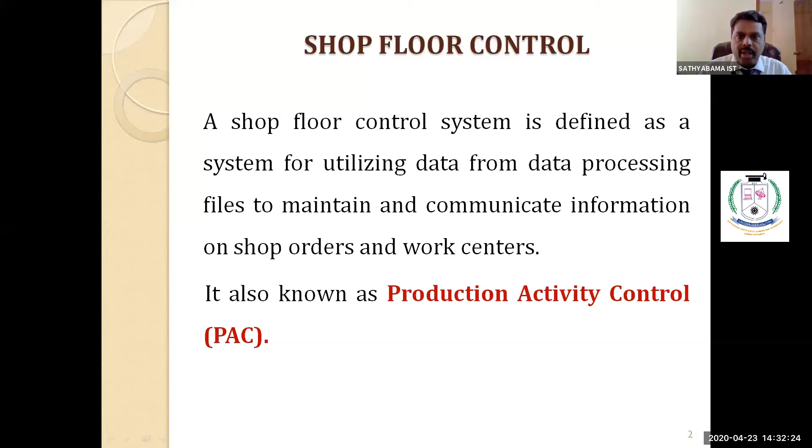If you consider any manufacturing industry, shop floor control is essential not only for utilizing data from the data processing file, but professionals have to maintain and communicate information on present job orders and the work centers available in the particular concern or industry. That is why it is called production activity control.

Next, I can move on to the functions of shop floor control. There are 5 important functions. The first is scheduling, that is product scheduling, when the product is to be manufactured and when it is to be dispatched, that is dispatching. Then the follow-up after dispatching is very essential to get customer satisfaction. Once the customer is satisfied, only then can they give repeated orders for any kind of components. So follow-up function is very crucial with respect to the customers.

Then providing output data, which relates not only to the product but also to how many products per day the unit can manufacture, and the capabilities of the factory to manufacture that particular product or part. Then providing efficiency. Apart from scheduling and proper dispatching, the follow-up with customers will be crucial. Based on that, customer satisfaction can be achieved and one can get repeated job orders for any particular part.

So providing output data is also follow-up communication, which is very essential for any industry. And then providing efficiency, not only in dispatching the component properly but also in proper follow-up, and the quality of the products manufactured by the concern should meet the customer's requirement and should be as per the standards.

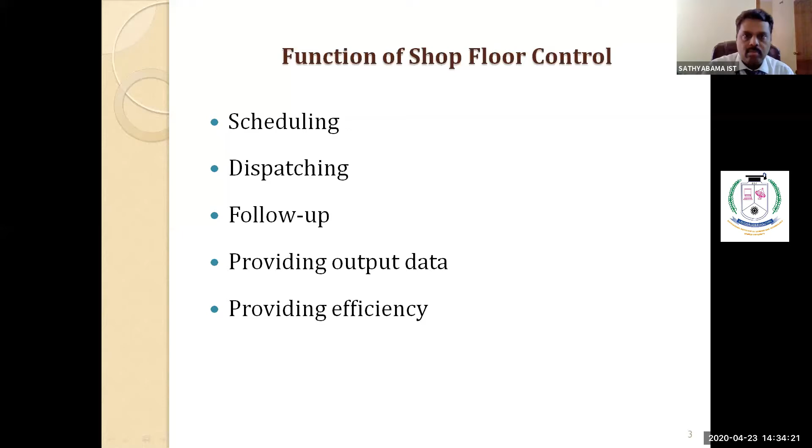So I would like to give an illustration of shop floor control. To understand this concept in a simple manner, consider new orders X, Y, and Z coming from 3 different customers. This is the place where unreleased orders are kept, meaning the orders may not yet be approved for production. This is the production control people or professionals who operate or control the unreleased orders.

Once a new order X gets approved from the authorities, the production control people, by considering the availability of work centers, machine tools, and skilled professionals, will release the order, which comes as an input. This is nothing but work in progress. The professionals or skilled laborers, with the help of machineries and available machine tools, manufacture or do the machining process of the particular product, converting raw material into a full-fledged product as per customer requirement.

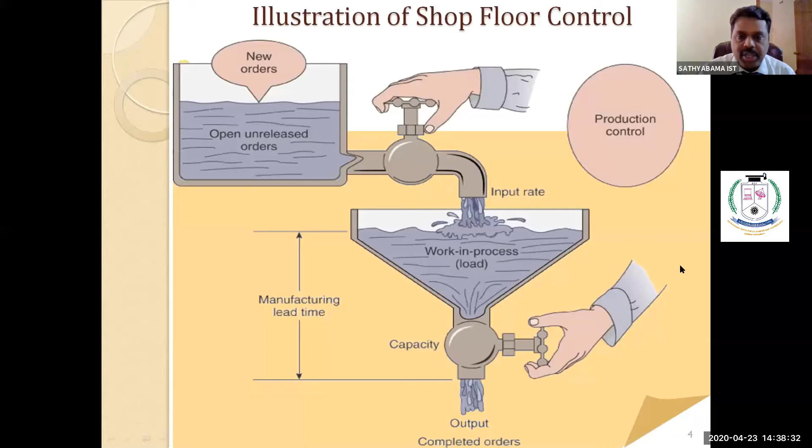Now I can move on to the phases of shop floor control. The first and foremost phase is order release. This phase provides the documentation needed to process a production order through a factory.

Normally, proper approved documentation is required for processing a production order. As I said in my previous illustration, customer X, customer Y, and customer Z might give different job orders, but to process the job order or production order, specific approval from the production planning control team is very significant and essential.

Once the document is available, only then will the production planning and control people process the production order through a factory or company. The collection of these documents is called a shop packet.

The shop packet consists of route sheets. A route sheet is the sheet which contains the sequence of manufacturing or production operations along with the available machine tools and necessary instructions. All manufacturing concerns have route sheets, and based on them they proceed with machining operations in a sequential manner so the job can be completed within the stipulated time period without affecting the customer's requirement.

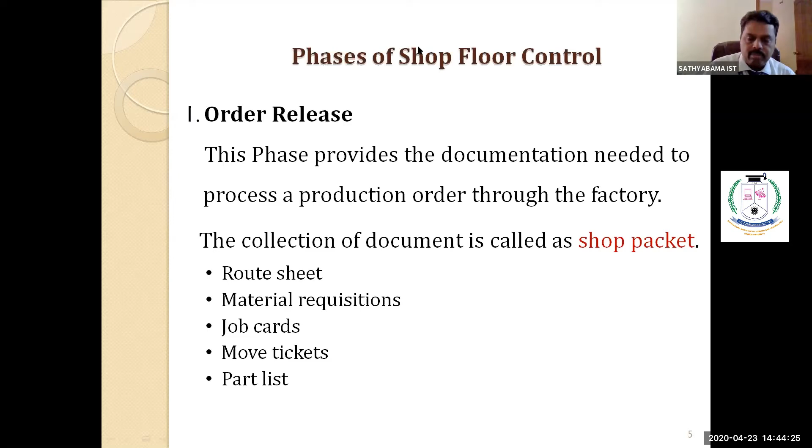Next, I can move on to the second phase of shop floor control, which is order scheduling. Order scheduling executes the dispatch scheduling. Dispatch scheduling is about when the product should be manufactured and how many products should be manufactured. These things are planned by the production planning and control department, and accordingly the dispatch schedule will be prepared.

Let us consider an automotive industry to explain order scheduling. They manufacture different automotive components such as brakes, axle, steering knuckle, and cylinder caliper. Suppose an automotive manufacturing company urgently requires front axle and rear axle. Normally they will inform the particular manufacturing firm or concern about the requirement.

This requirement is immediately communicated by the authorities to the production planning and control department of the concern. The PPC team will plan for dispatching the front and rear axle on a priority basis. The second priority may be the brakes, which can be manufactured as a second priority. Such priorities are defined by PPC engineers and professionals, and based on that they prepare the dispatch schedule.

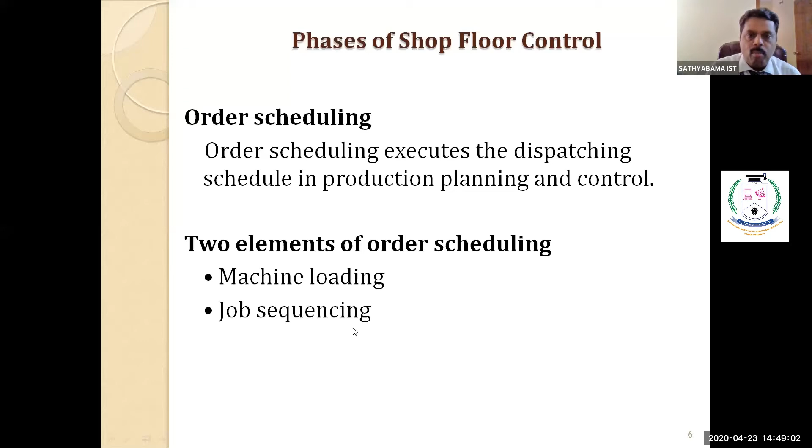So the two elements of order scheduling, machine loading and job sequencing, play a crucial role. I can move on to priority sequencing rules, or dispatching rules. Normally, production planning and control engineers or professionals consider these priority sequencing rules, so you have to understand these terminologies.

One is SOT, which means shortest operating time, and EDD, another significant term, meaning earliest due date. Then there's STR, which can be calculated with the help of a small formula. STR is nothing but slack time remaining.

Now you have to consider a due date. For example, an automotive product like a brake has to be manufactured in a brake manufacturing firm. Suppose the due date given by the manufacturing firm is 30th April, and today is 23rd April. So 7 days, or 7 into 24 hours, is the time available before the due date, minus the remaining process time.

Normally, to manufacture the brake, the raw materials should undergo various machining operations. For example, while calculating the STR, if 2 or 3 manufacturing processes are completed and 2 remain pending, you have to consider the time taken for finishing those 2 remaining processes, and then subtract that from the time remaining before the due date.

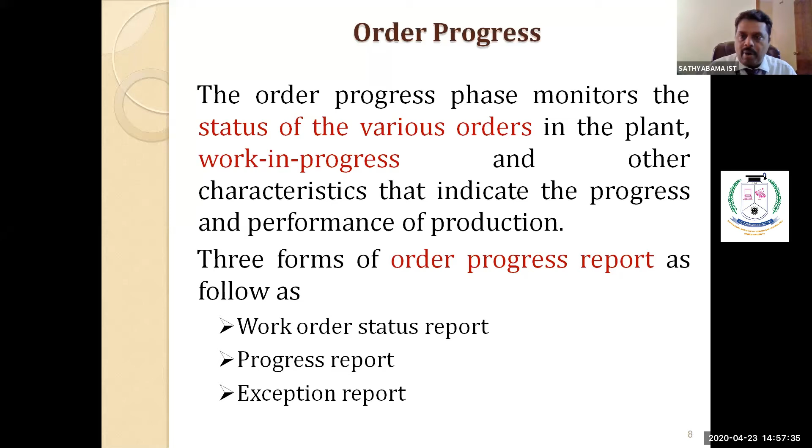An exception report specifies that some of the components may not be given priority because of the demand raised by the particular customer. That's why they can give some exception, they can give some time period, so that in the priority wise it can go beyond a certain level.

By standing in a single place, even two professionals can control a big manufacturing firm. Now most of the automated industries are using programmable logic controllers in order to control the shop floor, so PLC based control of machineries as well as equipment. And now the future of shop floor control will be influenced by virtual reality as well as virtual keyboards, and apart from that, artificial intelligence and cloud computing.

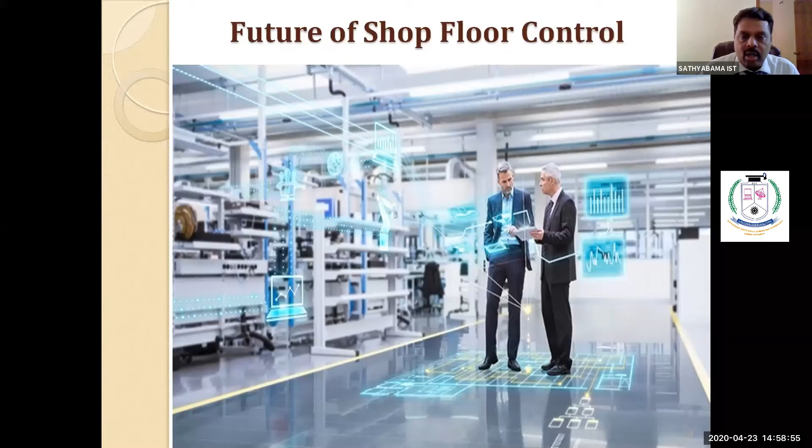Now I can move on to factory data collection systems. It is very essential to collect different data pertaining to a factory or shop floor. Normally they used manual methods in order to gather the information, but now they are using some automated systems in order to gather the data.

When a manufacturing firm is using automated systems, it doesn't require any human intervention or participation. Normally, in order to collect the data pertaining to a product, machine tool availability, material inventory stock, as well as preventive and breakdown maintenance activities, they use manpower, that is production planning people. Nowadays, a fully automated industry doesn't require any human intervention.

So what kind of data is collected by factory data collection? The first and foremost one is the list of number of parts that are scrapped. That means how many parts don't have any usage at all. Then the list of number of parts that require rework.

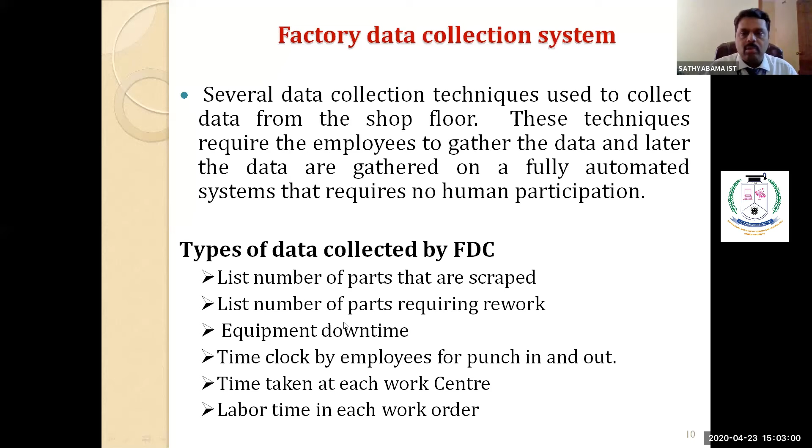So next I can move on to types of data collection systems. There are two types of data collection systems available. One is the online data collection system. Another one is the offline data collection system. You can easily understand even by seeing this particular type itself.

The online data collection system requires a full-fledged computer system or computer server so that the data pertaining to various shop floor activities are entered directly in the computer system. This database is very essential in order to plan, monitor, and communicate different data pertaining to the shop floor, to the work center, as well as to the working professionals.

The next one is the offline data collection system. The data are collected temporarily by employing some manpower or even an automated system. But it will not be directly stored in a computer server. It can be stored in a temporary or secondary storage device, and then from the secondary storage device, the data pertaining to the shop floor activities will be processed by the plant computer in a batch mode. Okay.

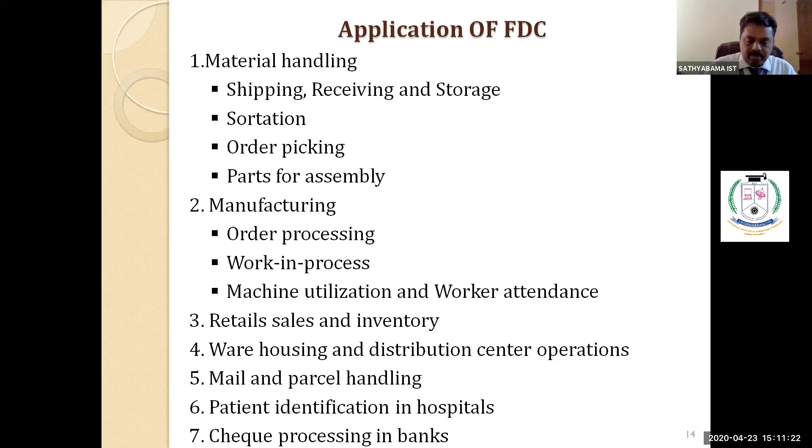These are general applications. Barcode technology was invented by Woodland and Bernard Silver of the USA in 1949. It is the most famous technology. Most retailers use barcode technology to identify the products available in the retail shop. Barcode technology is also used on the shop floor, especially in manufacturing firms, to identify components or parts.

Next, radio frequency identification. Most companies use either barcode or RFID. When you show the RFID tag to a sensor, it senses and sends the signals through the antenna to the reader. The reader or transceiver receives the signal and the data is stored in the host computer. Let us consider one practical example.

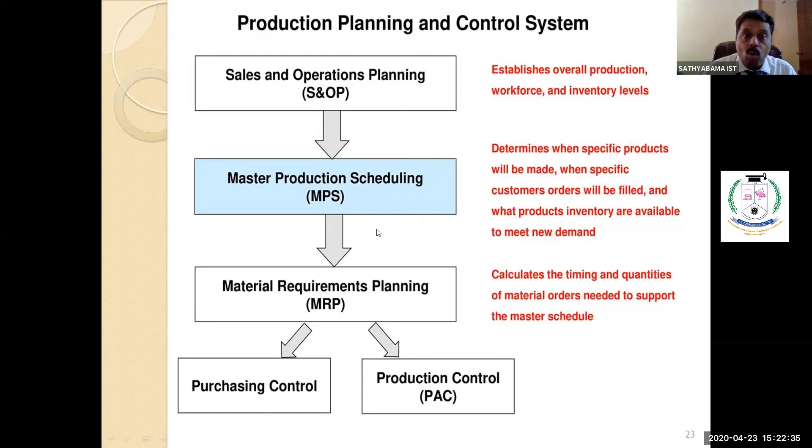So by considering these inputs in a very sequential manner, top order, purchase control and production control processes are carried out. This flow chart will give you an overall view about production planning and control. Now I would like to give a real-time example for master production scheduling. This kind of scheduling normally happens in any kind of manufacturing industry.

5 and 6. Like that, a master production schedule should be planned for each and every component or two different components in a systematic manner. That will give a clear idea to the production control people so that they can manufacture stool X and stool Y within the stipulated time period. And there will be no barrier for receiving the job order and delivering the product, as well as customer satisfaction.

Master production schedule should take into account customer requirements, customer job order, capacity of the plant, time constraints. What is the actual time available in between the job order receival and delivery? Production efficiency factor. It mainly depends upon production batch size and inventory holding level.

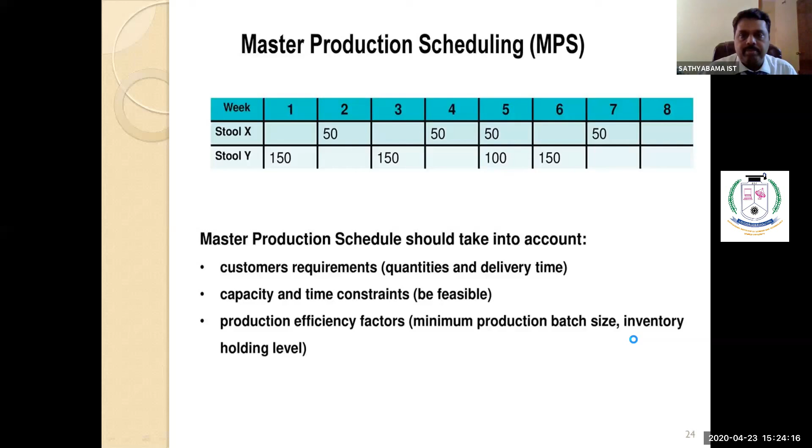Now, the function of the master production scheduler is very essential. He has to balance both resources in the form of materials, resources in the form of capacity of the plant, capacity of the machinery, and then requirements. Sometimes customer orders may be very high, so they have to increase the working time. They have to give OT, overtime, for the employees so that they are able to manufacture the particular product within the stipulated time period. Safety stock, orders from the final warehouse. So these are all coming under requirements.

So the master production scheduler plays a very crucial role. He has to balance the resources and capacity of the plant, resources not only material, the skilled laborers, etc., and requirements from the customer side, requirements from the forecast. So the master production scheduler has to balance accordingly. He has to prepare the master production schedule so that the production process is carried out within the stipulated time period, and then the manufacturing firm is able to dispatch on schedule in a proper manner.

So this is an identification which is used in master production scheduling in a production environment. This identification is for make to stock, this is for assemble to order, and this is for make to order. So by reading this particular identification, accordingly in production scheduling and the production environment, they can prepare the part, they can prepare for inventory, or they can prepare for assembly.

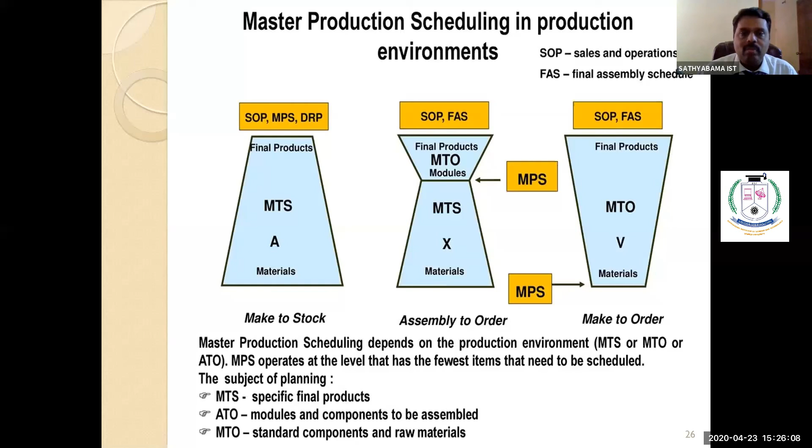So according to that input, MRP should be planned, and material requirements planning is carried out normally in a manufacturing industry, even in automated industry. Material requirements planning is very, very essential. If the planning fails, not only will unnecessary storage of material take place in a particular manufacturing firm, but it will also lead to over cost for the production. That's why the role of material requirements planning is very, very essential for the success of a manufacturing firm.

By considering manufacturing orders, purchase orders, various reports, as well as production planning, they will plan for material requirements planning. So normally a manufacturing person working in the automotive industry or automated industry, even though they are employing programmable logic controllers or artificial intelligence based PLC systems, has to prepare the material requirements planning, because material is the first and foremost important